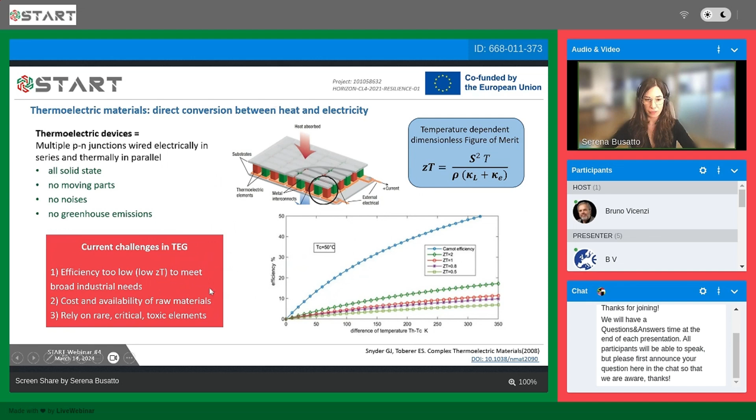So for these reasons, they are still limited to niche applications in most cases, but there are a lot of possible other applications that have been demonstrated and would be really important to apply and would be convenient cost-wise and efficiency-wise if the ZT values would be a little bit higher.

Okay, so in this presentation, I will talk about why mechanical alloying is very important for thermoelectric materials and can increase the properties of thermoelectric materials. So first of all, I will talk about the industrial scalability of the process and the fact that it's compatible with downstream consolidation techniques such as SPS. Then I will talk about the fact that mechanical alloying provides a material with nanostructure, which is very important to decrease thermal conductivity, which increases ZT of the material.

And also mechanical alloying is a low temperature process which allows to process materials and phases that are not stable up to their melting point, which is the case of tetrahedrites that we use as our raw materials. And finally, mechanical alloying is a solid state process that doesn't have byproducts. So it is possible to modify the material composition of the raw materials.

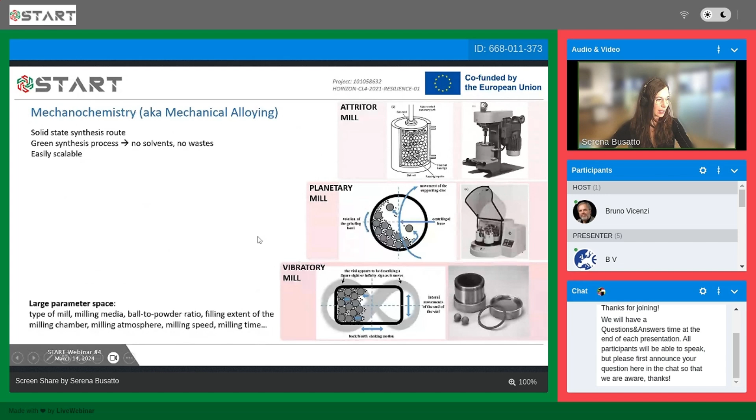Mechanochemistry is, as I said, a solid state synthesis route. So this is a green process and it is easily scalable. There is a large parameter space that can be adjusted. And the reactivity of the powder particles is promoted through mechanical forces under non-equilibrium conditions near room temperature by the transfer of mechanical energy to the particles, which generates dislocations and other defects, enhances the mass transport properties and the rates of particle-to-particle collisions, therefore also exposing continuously new surfaces, and all of these promotes reactivity.

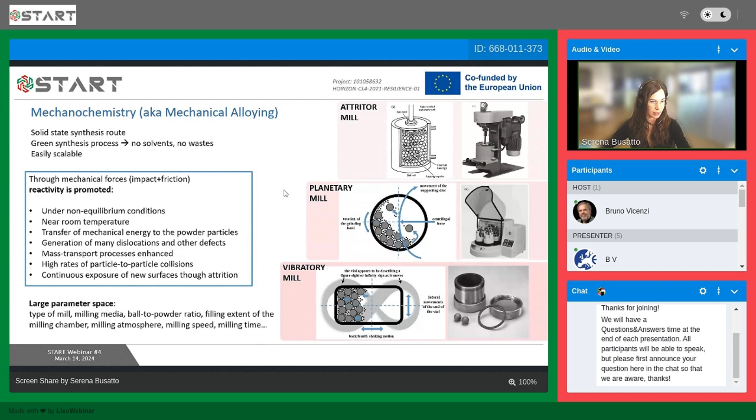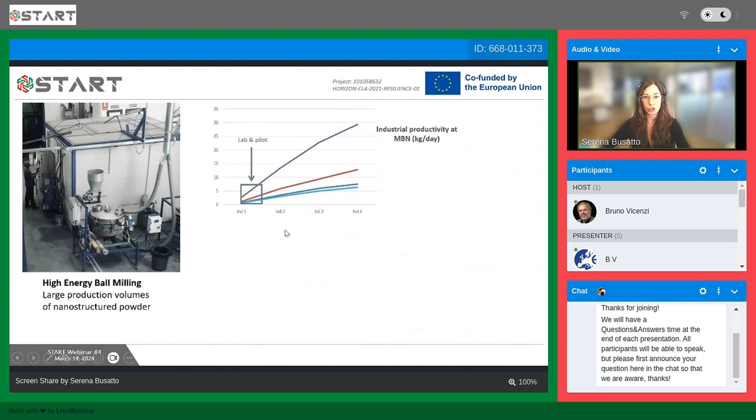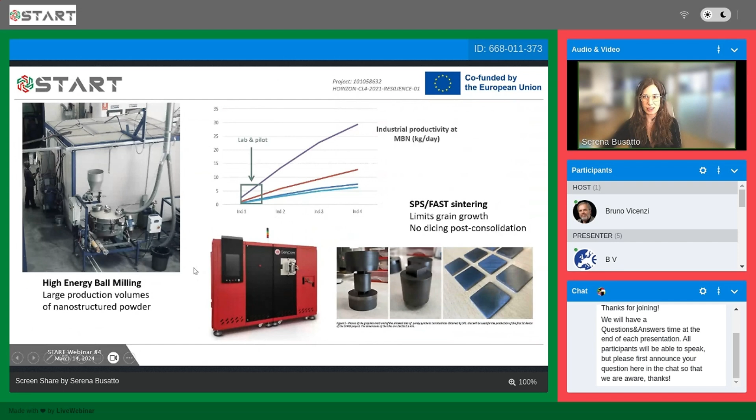Here I showed some examples of mills that are used at lab scale, but what we actually use at MBN are much larger high energy ball mills. Here you can see a person for scale, and we produce very large volumes of powders. And so the high productivity that we can reach combined with the sintering technology that is developed at GeniCore and will be described later by the next speaker, permits to make this process industrially convenient.

Let's go then now to the nanostructure and why this is important. I will first show you the figure of merit of thermoelectrics, how thermoelectrics work. So here is an example of a thermoelectric junction. What happens in thermoelectrics is that the carriers, that are electrons in N-type materials and holes in P-type, drift from the hot surface to the cold surface, and this builds an electrical potential across the material, which eventually counterbalances the drift. And the proportionality constant of the created potential over the temperature gradient is called the Seebeck coefficient, and describes the thermopower of the material.

Then this is the thermoelectric figure of merit, ZT, and depends on several properties. So the Seebeck coefficient is S, and then we have the electrical conductivity and the thermal conductivity. And as you can see here, unfortunately, the Seebeck coefficient and the electrical conductivity have two different trends. So one is higher for insulators, and the other one is higher for metals. While the thermal conductivity increases with free carrier concentration.

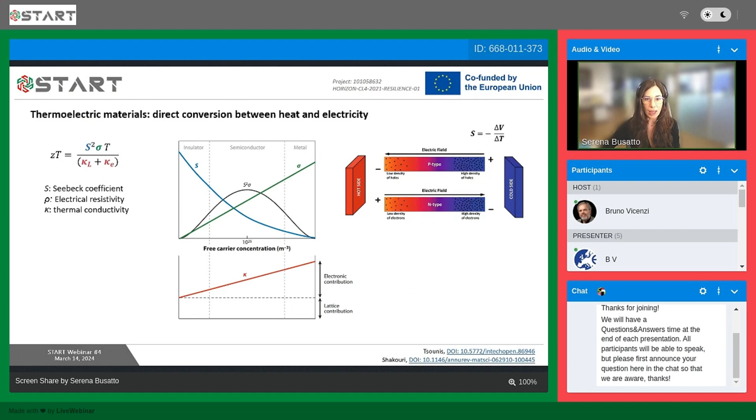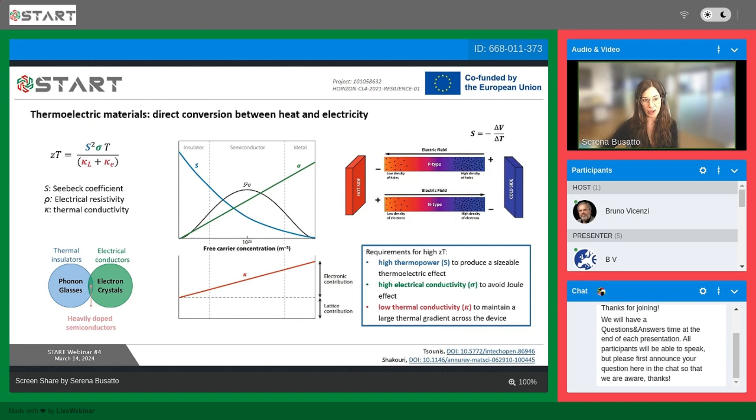This is why the requirements for having high ZT are to have a high thermopower to produce a sizable thermoelectric effect, but also to have a high conductivity to avoid Joule effect, and also to lower the thermal conductivity, as you can see from the formula here, to maintain a large thermal gradient across the device. So basically what we need to find are the so-called phonon glasses electron crystals, so thermal insulators but electrical conductors, which in fact are found in heavily doped semiconductors.

But why is nanostructuring so important? It's so important because the thermal conductivity has two contributions. One is from the lattice and one is from the electrons. But the one from the electrons is related to the electronic conductivity by the Wiedemann-Franz law, and therefore it cannot be lowered. So what we need to minimize is the lattice contribution.

And we can do so by nanostructuring, because the grain boundaries act as phonon scattering sites, and minimizing the mean free path of heat-carrying phonons can minimize thermal conductivity, while the electron transport is almost not affected by this.

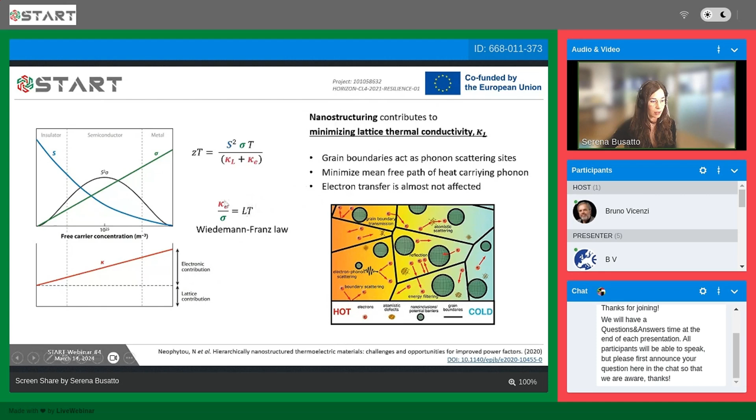Let's proceed then to talk about the tetrahedrites and how these materials can be treated by mechanical alloying or mechanochemistry. So tetrahedrites are sulfosalt minerals that are very common and are one of the main sources of copper and silver worldwide. They are abundant in nature and are found in mine tailings, normally in abandoned copper mines.

So they have many positive aspects: they have no critical or toxic elements and are suitable for large-scale production, and also have very tunable compositions that confer them diverse properties. Unfortunately, the ZT values are not so high compared to other materials, but their cost and availability make them still very, very important.

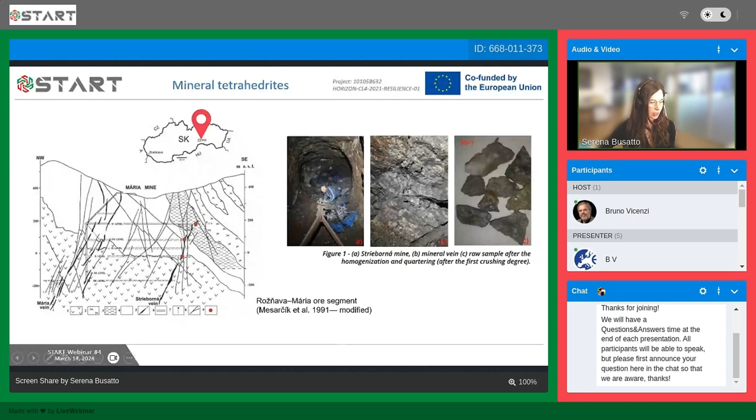Okay, but mineral tetrahedrites can have very variable compositions. So they are normally present as a solid solution between the tennantite and the tetrahedrite form. This means that at the antimony site, both antimony and arsenic can be present, and also that the copper can be partially substituted with other transition metals. Iron, zinc, manganese, and mercury are some of the most present in mineral tetrahedrites.

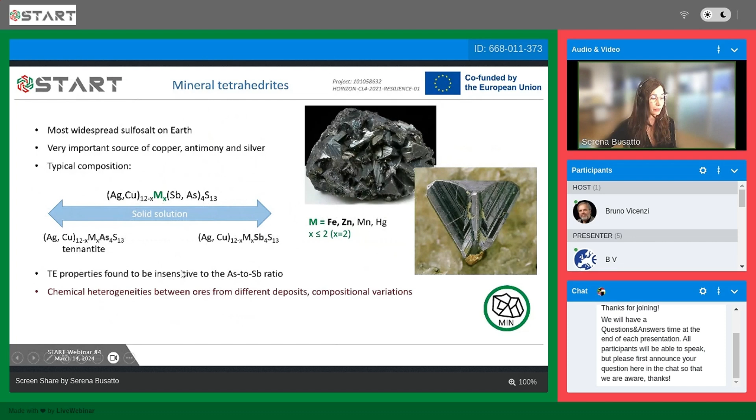Fortunately, the thermoelectric properties are not sensitive to the arsenic to antimony ratio, so this is a good thing. But there are some drawbacks. Different ores from different mines have many different chemical compositions, so it's difficult to find a process that works for all of them. And also they contain variable amounts of secondary mineral phases that can be difficult to treat, like chalcopyrite, quartz, and pyrite.

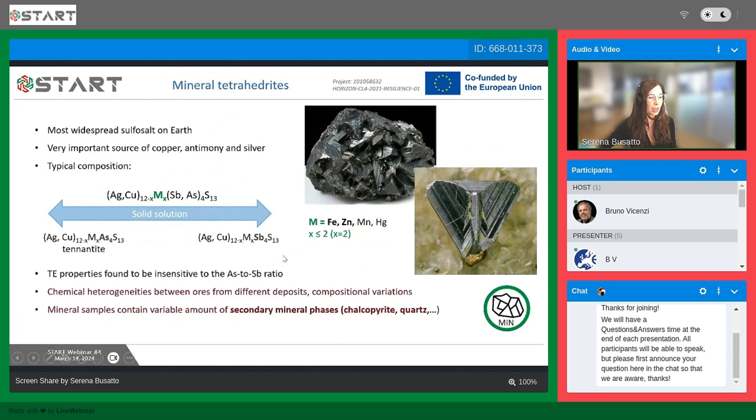This is the crystal structure of tetrahedrite. It's a very complex unit cell, composed of 58 atoms per unit cell, and this is one of the reasons why the thermal conductivity of this mineral is so low. And the other reason why it's so low is because there is a rattling motion of some copper atoms, resembling that of other thermoelectric materials like skutterudites and clathrates, that also contributes strong phonon-phonon scattering and lowers the thermal conductivity.

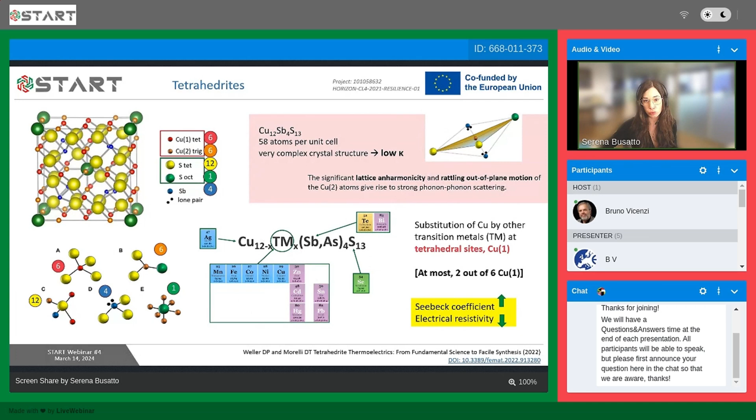Here you can see how all these different metals can be incorporated into the tetrahedral copper sites. So there are two different copper sites, tetrahedral and trigonal, and 2 out of the 6 tetrahedral copper sites can be substituted by other transition metals, conferring higher electrical conductivity and higher Seebeck coefficient.

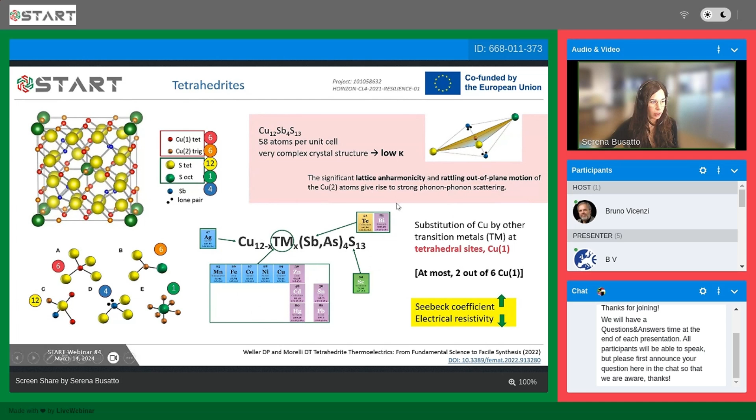Here is some further reading. This is a very recent paper and explains better why this rattling motion, and it's even more than a rattling motion of the copper atoms, can provide this very low thermal conductivity.

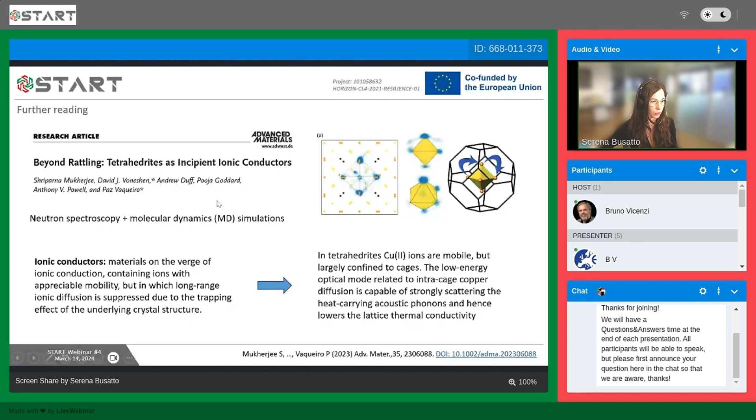The synthesis methods for tetrahedrites are multiple; some of them can be scaled up and others not. Melt crystallization and solution phase synthesis give very good phase control, but unfortunately are not scalable. In addition, solution phase synthesis also gives nanostructure to the material, but this is accompanied by byproducts. Other methods that have been tried are reactive SPS, which is very promising, but for now the phase control is not that good.

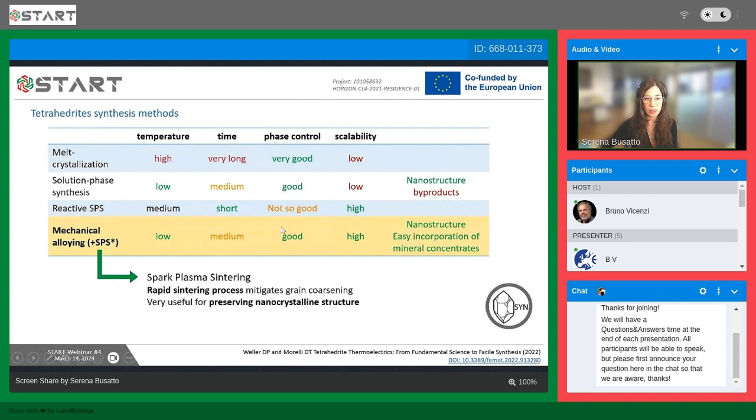And finally, mechanical alloying followed by spark plasma sintering is one of the best methods for the synthesis of tetrahedrites because of the low temperature, medium time, good phase control, high scalability, and also nanostructuring and easy incorporation of the mineral concentrate. And then the rapid spark plasma sintering process mitigates grain coarsening. That's very useful for preserving the nanocrystalline structure.

Okay, so then we go to this part, where I will explain to you how practically in the START project we use mechanical alloying and tetrahedrites. So we performed a very extensive experimental campaign using ball milling at lab scale, sintering, and measurement of the thermoelectric properties to identify the most performing tetrahedrite composition in terms of transition metal dopants that substitute at the copper sites. Taking into consideration many factors, among them the doping elements already present in the mineral concentrates, the phase formations, the thermal properties, electrical properties, and the stability of the tetrahedrite phase with these substituents.

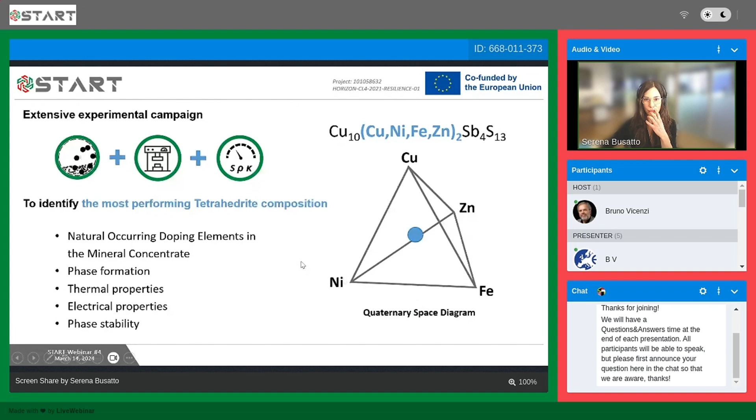So we work in these quaternary space diagrams and we identify the most performing composition. With this, we try to replicate at a larger scale. So here at MBN, with our high energy ball mills, the synthesis, and we could obtain the same phases that were obtained at lab scale. Also, we noticed that the presence of transition metal substituents not only improves the figure of merit, but also favors the stabilization of the tetrahedrite phase over the concurrent famatinite, which is not thermoelectric active.

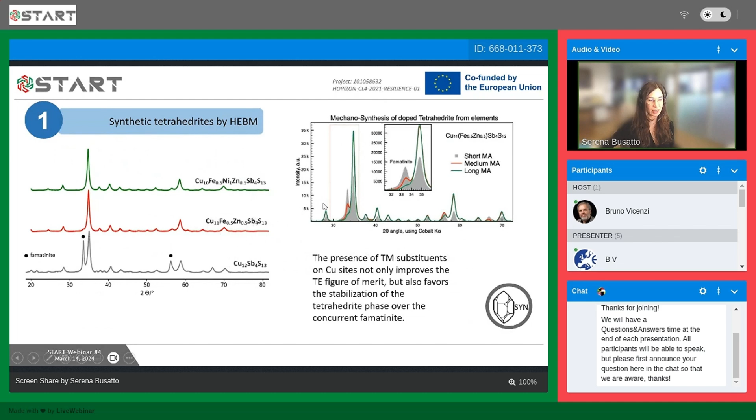So the rest needs to be balanced by adding synthetic elements. Of course, we count silver together with copper. And in case there are arsenic or bismuth in the composition, we count them together with antimony because we know that they will substitute that site. Okay, then we compensate with synthetic elements to reach the target composition. So this is what we tried.

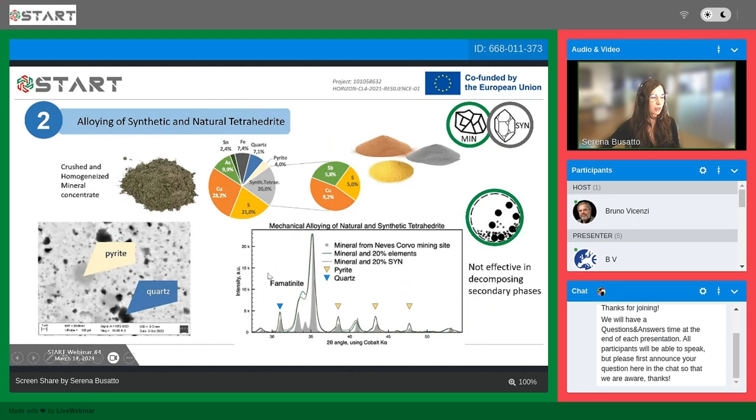This is an example of a concentrate that we received that was crushed and homogenized tetrahedrites, but unfortunately contained also some amounts of other phases such as pyrite and quartz, which were quite stable also to the ball milling process, which in fact was not effective in the decomposition of these secondary phases. But fortunately, there is something that we can do, and here I use the START robot to show you the electromagnetic separation, a very interesting process largely used in mining technology because it permits to separate magnetic and non-magnetic materials. And in our case, it could almost completely remove pyrite and quartz, so that we could get a concentrate that was more or less free of these other phases, difficult to treat.

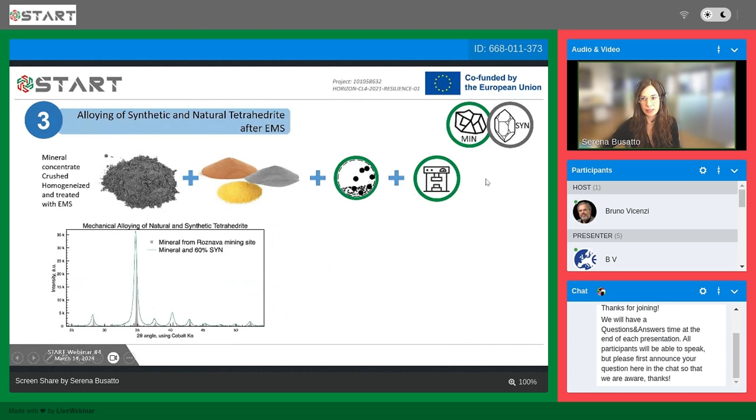So what I showed you in this presentation was that we first identified the element substitution that would give the best thermoelectric performance. We optimized first the composition for the synthetic tetrahedrites. Then we developed a scalable and environmentally friendly powder-based synthesis method for producing at large scale mineral-derived sulfide P-type thermoelectric materials. And GeniCore optimized the SPS consolidation of these materials for the production of mineral-derived sulfide P-type thermoelectric legs.

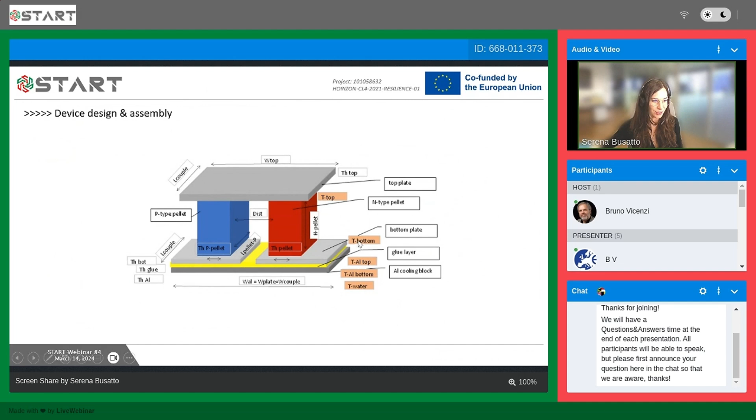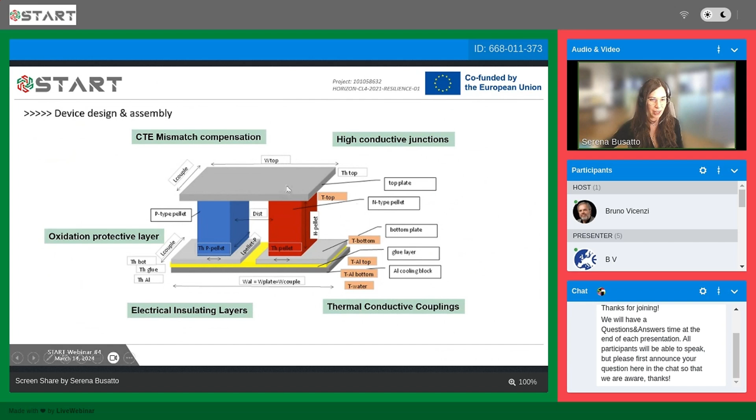So in other webinars, we will also talk about the development of the N-type material and also all the other things that are necessary in order to have good junctions, to protect from oxidation, to minimize the mismatch in the thermal expansion coefficient, and all the other things that need to be optimized in order to have good thermoelectric junctions. Okay, and with this I would like to wish you all a happy Pi Day.

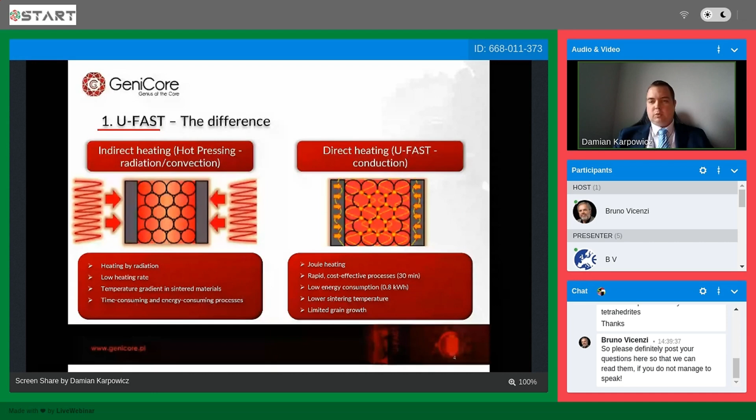When it comes to the pulsing system, when you read some information about the SPS technology, you will find that there's no 100% fact how the pulsing works. So there are also people using SPS technology who state that pulsing is not important and not necessary. Of course, we need to say that for some of the materials it's true, but there are materials where the pulsing has a big impact. So today I will try to show you some examples of those kinds of materials.

When it comes to GeniCore, maybe this is not the perfectly colorful graphic, but this is the waveform just taken from the oscilloscope to show you an example of the pulse. In the case of GeniCore, we can generate pulses below 1 millisecond, which we like to call micropulsing.

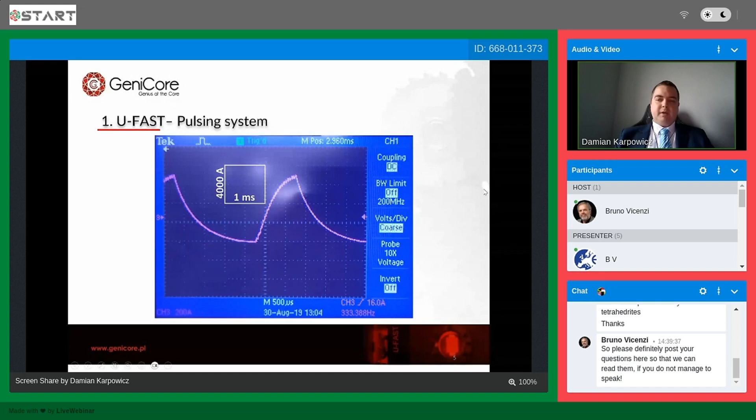For the SPS process, graphite molds are used. Different kinds of molds can be used, but in general, graphite molds are the best, thanks to their high resistance to pressure and temperature. And in GeniCore, we are able to produce the molds for our customers by using just graphite blocks. Otherwise, you may find that purchasing graphite molds may be expensive.

However, it needs to be emphasized that in SPS technology, we can directly sinter the powder. In this case, I just wanted to show you that for some cases when we produce, for example, multi-cavity, multi-layer forms, it will be easier for the operator to just load the molds with this kind of pre-compressed powder rather than to pour the pure metallic powder.

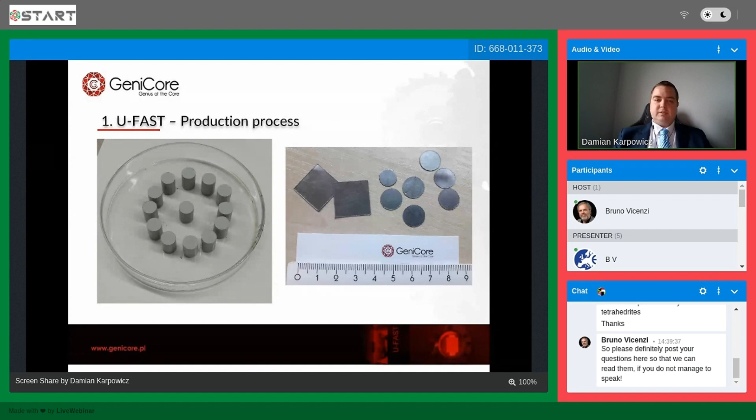We also use the graphite foil, which allows us to separate the sample from the graphite mold, which increases its lifetime significantly. So we can assume that one mold can withstand more than 100 processes if designed correctly.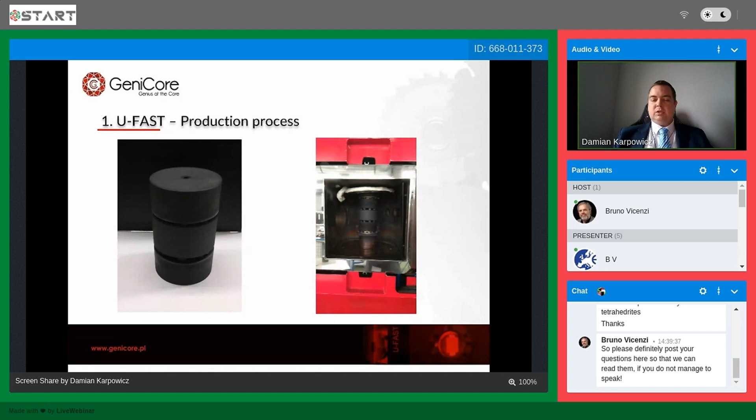So when it comes to temperature measurement, how we control what is happening inside, I think it is worth considering that temperature control is very, very important in SPS technology, because we need to watch out not to go too far with the temperature. And afterwards people see, even using other devices, that parameters are maybe not so accurate. But in the GeniCore solution, we are using mostly pyrometers. And when we make precise and accurate measurements with the thermocouples first, then the customer or user can just use the pyrometers.

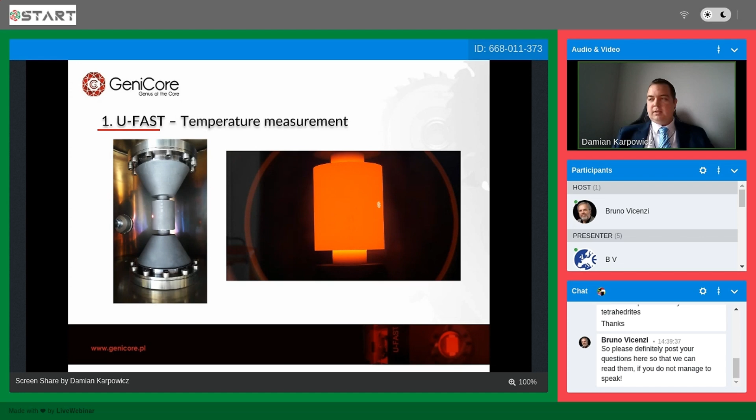So in this case, we are using the axial pyrometer, which is in the top stamp, top electrode of the device, and also two side pyrometers, which combined allow us to cover the full range of temperature, starting from room temperature up to 2500 Celsius degrees. In this specific example, we intentionally do not show the graphite blankets to allow you to see the laser dot, which typically in SPS devices helps you to position the pyrometers correctly by automatically controlling it with the servo mechanism and PLC.

So going to the devices, the smallest one, UFast Compact. It is very powerful, yet quite small. An interesting fact which we like to mention is that it can be transported even with a typical elevator, which we did at a recent event. We also posted it on LinkedIn, because it's very comfortable to have this kind of size. And yet, as you can see here, a very, very powerful tool when it comes to sintering.

So 3 kiloamps is enough for us to sinter 40 millimeter tungsten carbide, as you can see here, even with very high heating rates of 100 Celsius degrees per minute. And of course, we achieved full density. So we can sum up that this small device is all that is necessary for R&D institutes to work on small samples and hopefully scale up in future.

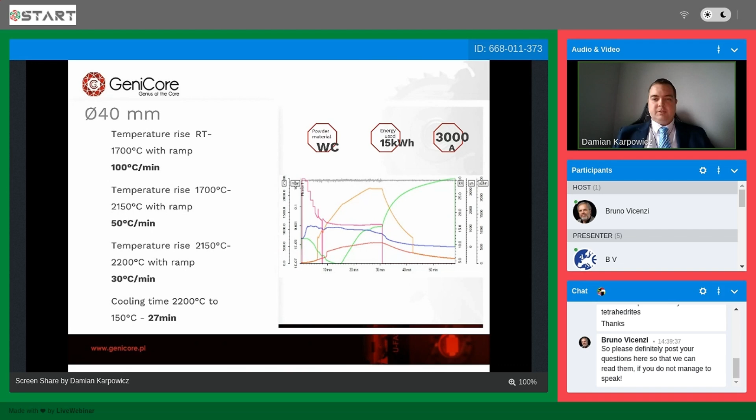The UFast GC device is the middle-sized, single chamber device, which allows us to produce samples up to 100 millimeters. It needs to be emphasized that up to 100 millimeters means full density, the best quality sample which can be produced using SPS technology. Sometimes, of course, you will be able to produce bigger samples, but 100 millimeters is what we recommend for this pressure and current available.

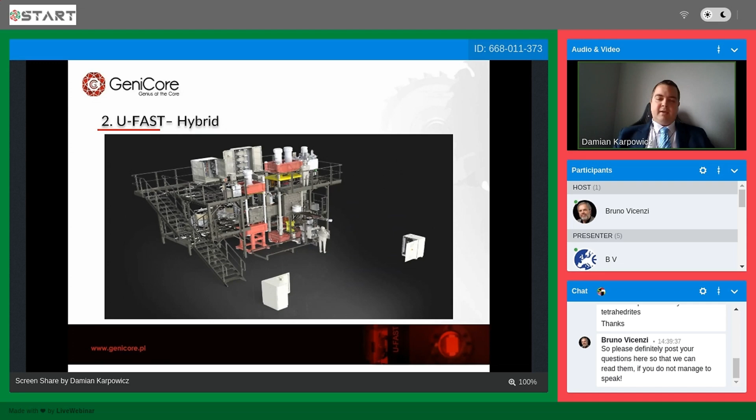The UFast hybrid, so the biggest device which is possible when it comes to GeniCore, very big diameters, which requires more than just the DC power supplies to offer the uniform temperature distribution while having at the same time the high heating rates. So as you can see here, there are several types. So currently we are building the biggest one

at GeniCore, which will have more or less a max heating power of 1 megawatt when it comes to the DC power supply. So as we can see, a very powerful power supply that allows us to use a lot of DC heating, and max heating power for induction. So a separate AC power supply to somehow enhance our sintering.

So we should understand that when we would like to sinter very big diameters like 200 millimeters, 300 millimeters, we should also consider the volume of the sample. So if we would like to heat in, let's say, an SPS way, so with high heating rates, with limited grain growth, which is the main cause of very good quality of the samples, we need to do it in a proper way. So that is why we allow our customers to use the DC and AC power supplies independently. And thus, the induction plus the DC power supply allow us to achieve very high heating rates, yet very good uniform temperature distribution. So this is the main idea for UFast hybrid.

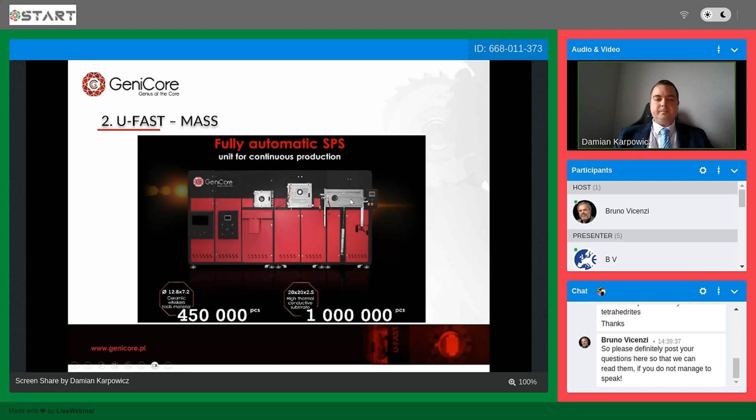The pulse plasma compaction technology is the one which we use for the DEC material production, so diamond enhanced cemented carbide, and it was also mentioned in the previous presentation. So to give you just some feeling about this technology, it is very similar to the SPS technology. However, we are using 2000 volts instead of 10 volts. So here we can confidently say that we have plasma inside. So it allows us to generate rectangular high voltage pulses and to sinter, for example, tungsten carbide with 30% of diamond content in whole volume without diamond graphitization.

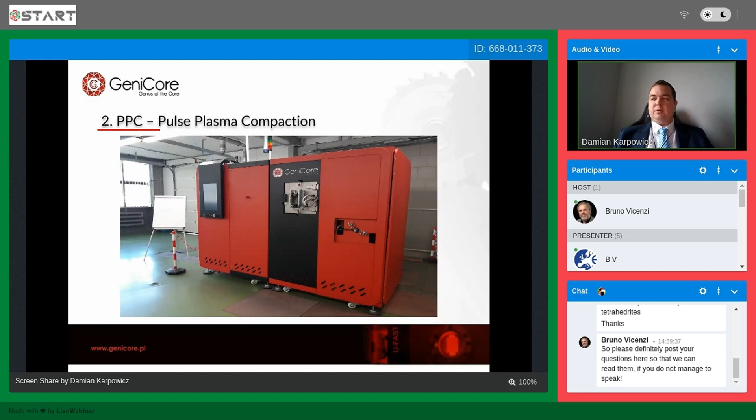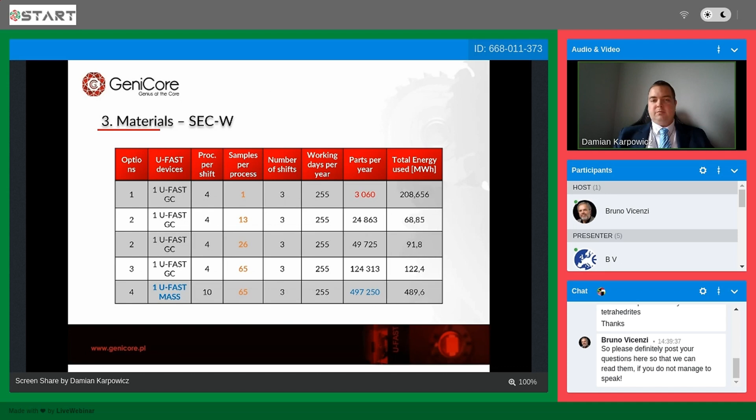And when we see the production examples, which are real readings from the power supply, we can see that UFast mass can produce almost 500,000 pieces per year, just with one operator and with very limited energy used. And as mentioned before, 65 pieces per one run. So it needs to be emphasized that we are able to achieve better results when it comes to mold designing.

Also, the sintering process time, you can pay attention to it, 75 minutes compared to 270. And this is literally because we are heating the powder directly. The cooling time, unfortunately, we didn't have a comparison to the conventional method. Nevertheless, I think we can easily assume it was also shorter because we use an advanced cooling system for the stamps, and the pore size and crystal size are also smaller.

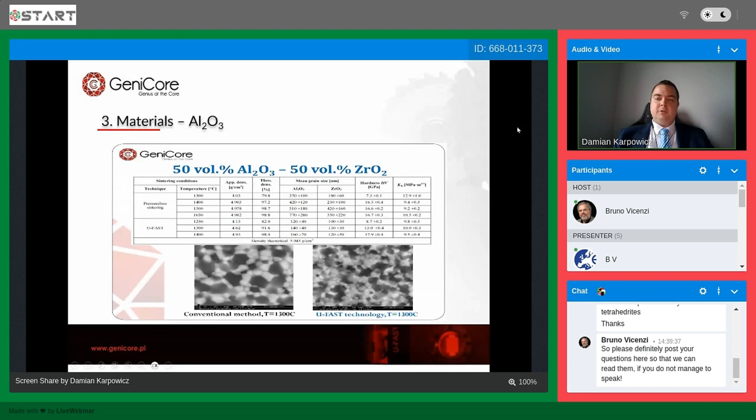When it comes to limiting the grain growth, I think this alumina can be a great example because with the naked eye we can see the difference between the conventional method on the left side and UFast technology on the right side. So this is the phenomenon which can increase the quality of our materials.

Transparent ceramic, there are a lot of applications where it can be used. We specifically had a chance to produce the covers for missiles. So infrared and guided missiles need to have covers on the top, and basically, transparent ceramic can be used there. However, there are some challenges related to the shapes when it comes to this application.

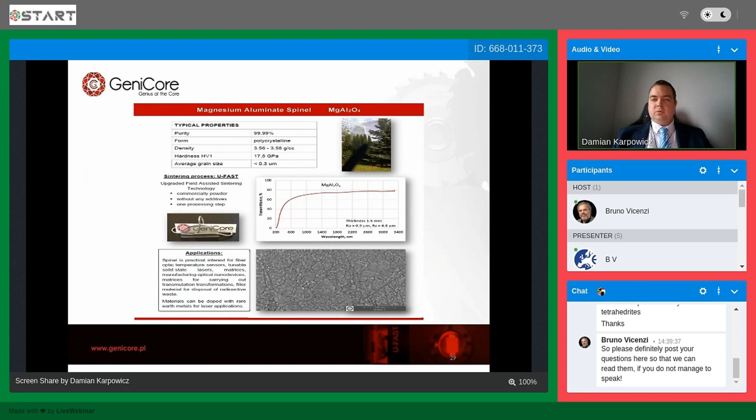Nevertheless, the idea was to show that you can produce with SPS technology fully transparent ceramic with commercially available powders without any additives. So no lithium, nothing, just the commercially purchased powder. And with one processing step, we are able to achieve the transparent ceramic. Also, magnesium aluminate spinel can generate very interesting results. If you would like to know more about it, please feel free to contact me and I will share the details with you.

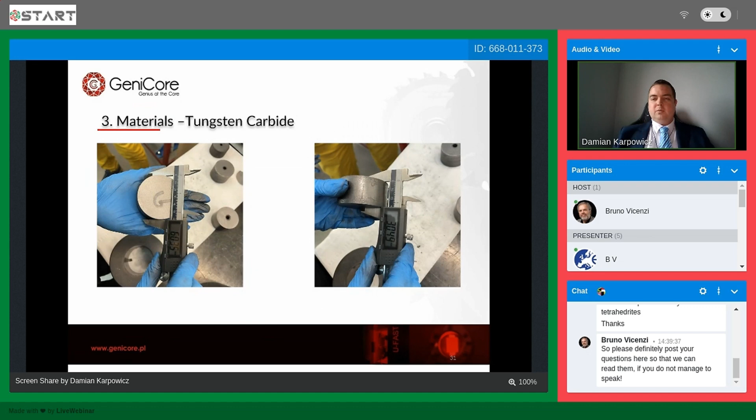Another example which I would like to share with you is tungsten carbide. This is specifically a project for our customer in China, the second biggest tungsten carbide producer, and they asked us to provide a device which will allow them to produce tungsten carbide with very high density and hardness, 60 millimeters in diameter, 30 millimeters in height. So quite big volume, almost 1.5 kilograms of tungsten carbide, and we achieved it. We provided both the device and the sintering process technology to allow them to start production immediately after commissioning.

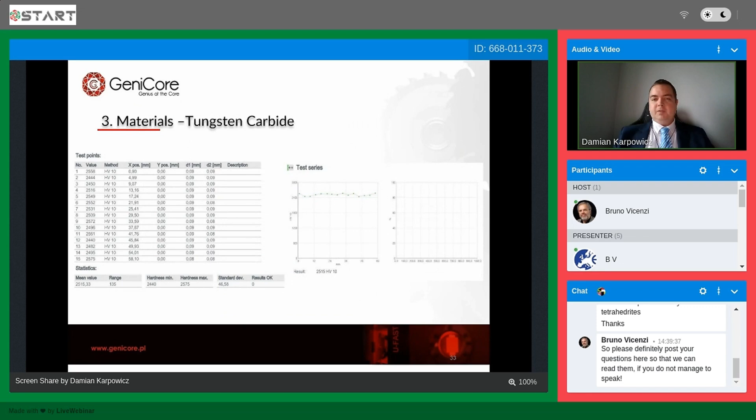And as you can see, the mean value of HV10 was 2,515, which is quite a good result in their opinion. And no porosity at all. So as we can see, the good sides of SPS technology are visible here.

For diamond enhanced cemented carbide, the material produced with the pulse plasma compaction technology, it was quite hard for us to start selling this material because besides selling the devices, we are also producing DEC material, as probably mentioned before.

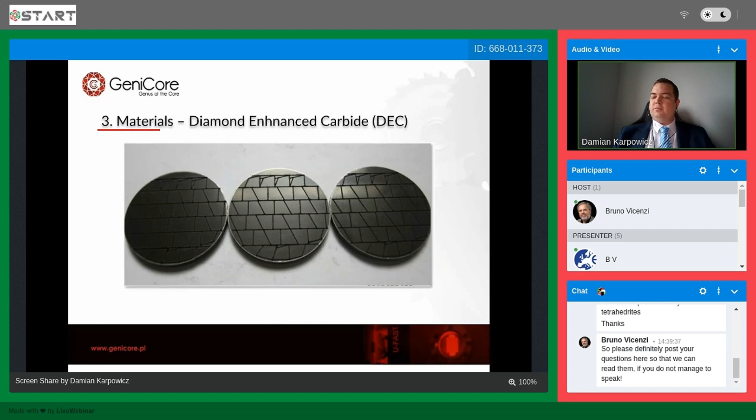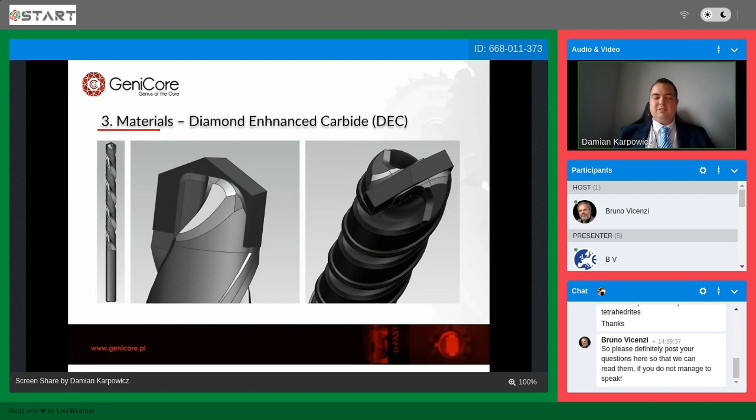So people initially didn't believe that we can sinter tungsten carbide with diamond in full volume without diamond graphitization. So we needed to generate some examples, and here you can see one. We purchased a drill just in the market and replaced the tip with the DEC material. And with the help of one of the companies from the group, we just made a drill. And after that, we performed the test. So a dry drilling test with the reference drill and the DEC drill.

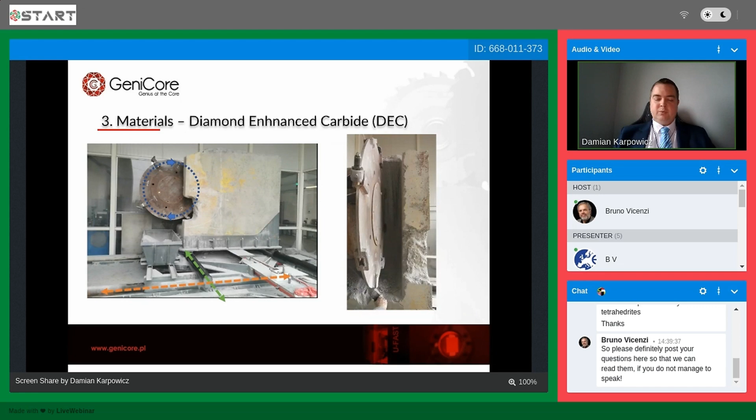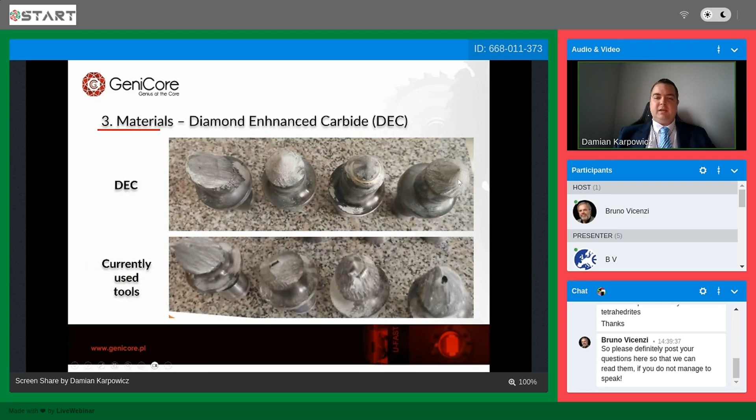In case of mining, we also have a lot of applications, but today I will show you the one from which it was started. So rotary pick knives, similar situation. We just took out the tungsten carbide and put our DEC material in it, and you can see the difference. These are the tools after performing a test with the mill, as you can see here. So we can see that DEC material can withstand much more than just typical tungsten carbide.

Functionally graded materials: we needed to learn how to sinter different kinds of material in layers. In this case, a layer composed of DEC, 30% of diamonds, formed on a tungsten carbide substrate, to limit the cost and make the brazing easier, because brazing is hard for DEC material. We need to admit that. It took us some time to understand how to do it.

Near-net shape production: this is more related to the disadvantages of SPS technology, so limited geometry. However, as you can see, we can also produce near-net shape materials. These are button bits, which are used in mines for drilling in roofs, for example, and also functionally graded materials, so DEC on the top and tungsten carbide on the bottom. There are also more sophisticated shapes available, even 3D printed by new methods. However, it will take some time to show you the results.

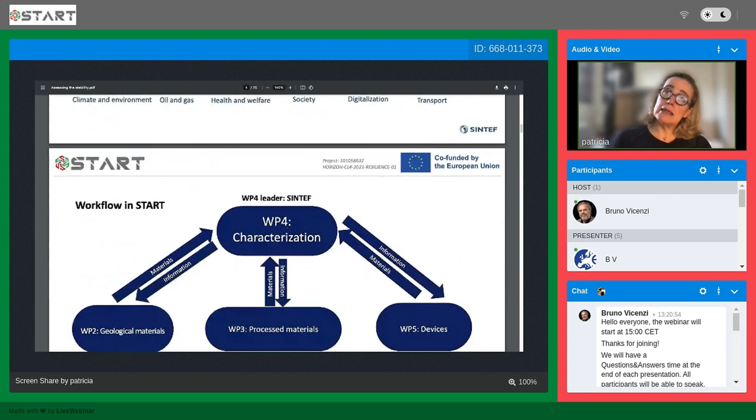But basically what they want to show here is that we are involved in most activities, ranging from wind, solar, oil, boats, construction, all sorts of things. And here you have just a list of the things we do. In our group, we work mostly with characterization of materials. We try to use advanced tools. We also do a lot of modeling, mostly atomistic, so DFT type of modeling.

So in the project START, as I told you, our major role is characterization. We are also involved in other work packages, but it's mostly characterization. So basically we get materials from the other work packages and then we provide information back. We also do some processing, but it's not so industrially applied, it's more fundamental type of processing.

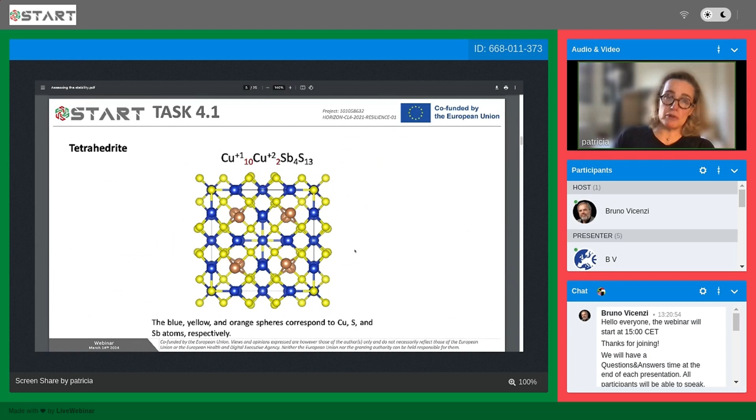So as Serena already told you, we are dealing with tetrahedrite. Tetrahedrite is based on copper, and these copper atoms have two types of positions, one with an oxidation state of 1 and another with an oxidation state of 2. So it means that we can replace these atoms with elements which have the same oxidation states. And so what we tried to do when we started was to see how we could maximize the performance of the thermoelectric materials.

If we go to the literature, we see a lot of different types of elements tested. And we decided, okay, let's try and see what we can get with these elements too. Of course, for the antimony, we don't really want to replace it with arsenic or tellurium, which are not very nice, and tellurium is not very abundant. So we stick with antimony.

So one of the first experiments we did, we decided to use a design of experiments. For this matrix we decided to use the Taguchi method, but we were a bit too wild, so we decided to go to very high variations in composition, which in the end proved not to be a good choice.

And at the lab, in addition to what Serena is doing at an industrial scale, we also use this very high energy ball milling. This is a machine that allows you to really make sure you put all the elements into a solid solution. But to do this type of experiment, we had to optimize the milling parameters, and we did that by running one of these Taguchi compositions, which in fact is a composition that is now being used, but we are not using nickel.

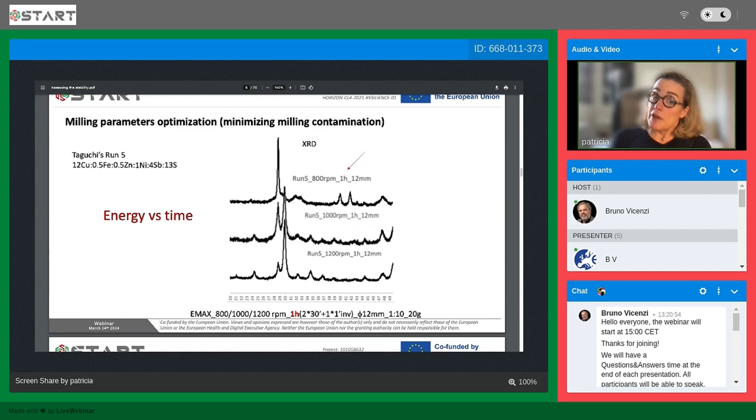And you can see that only at 800 and 1,000 and even at 1,200 rotations per minute, with 1 hour, we still don't get only tetrahedrite, because this peak here, which is at around 28, 29, is another phase called famatinite. So 1 hour was clearly not enough. And then we decided, okay, now let's go for 2 hours. And with 2 hours, we can see that for 1,200 rotations per minute, we only have tetrahedrite. So we were able to select the parameters.

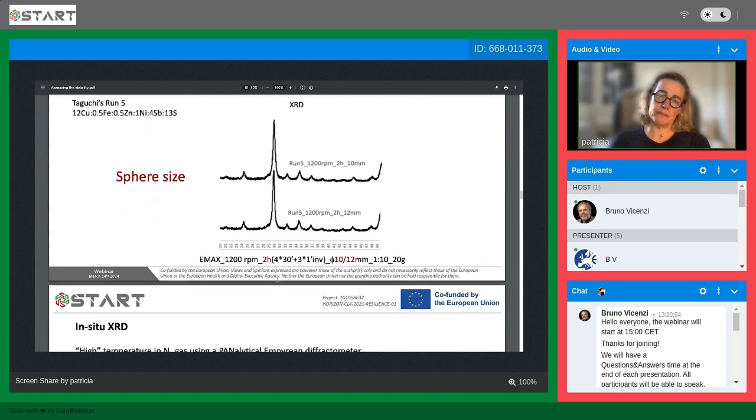The other thing we wanted to make sure was what kind of sphere should we use. And it turns out that either 10 millimeters or 12 millimeters are suitable to achieve what we wanted. So in the end, this was what we have chosen as parameters. Then one thing that we tried to do to characterize our material in terms of stability was to use in situ XRD. So you just do XRD while you're heating your material.

And so this was the thermal cycle employed. We started at room temperature, then we increased quite fast the temperature, we let it stabilize for 2 hours, and then we acquire another diffraction pattern, and so on. Given that we are thinking of using tetrahedrite for temperatures in the range between 300 and 400, this was the thermal cycle that we have employed. And if you look here, these are some of the runs we've done with these materials, which were a bit wild because they had too many substitutions.

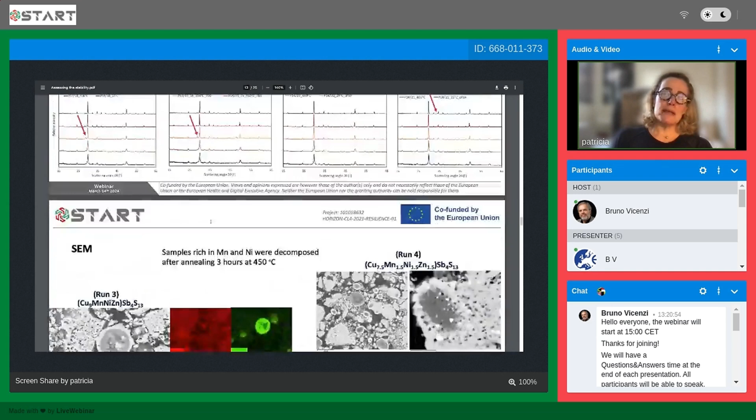When you look at the diffraction patterns, which were acquired at different temperatures, the bottom one is at room temperature, then 150, then 300, then 450, and then again, after cooling down, 25 degrees. And when you look at this, you see some peaks, but most samples are essentially tetrahedrite. But when we look at the SEM images, we see that we have a lot of things going on. There's a lot of decomposition.

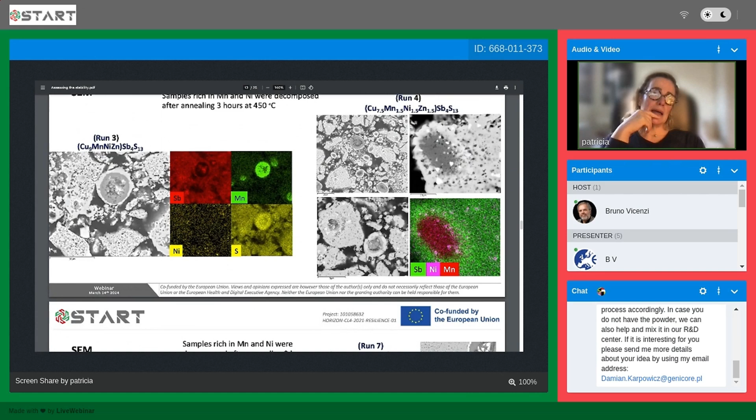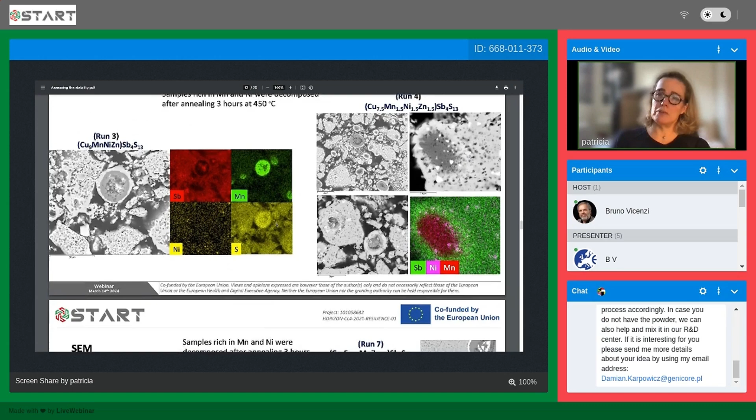And the most important aspect that we take from this initial study was that XRD is probably not the best technique. Even if you perform annealing while you're acquiring your XRD patterns, it is not the best technique because most samples had very complex microstructures. And one of the points that was really important and we are investigating now is that all samples after annealing had this type of dark phase. It looked like pores, but we were not completely sure what it was. Now we know what they are.

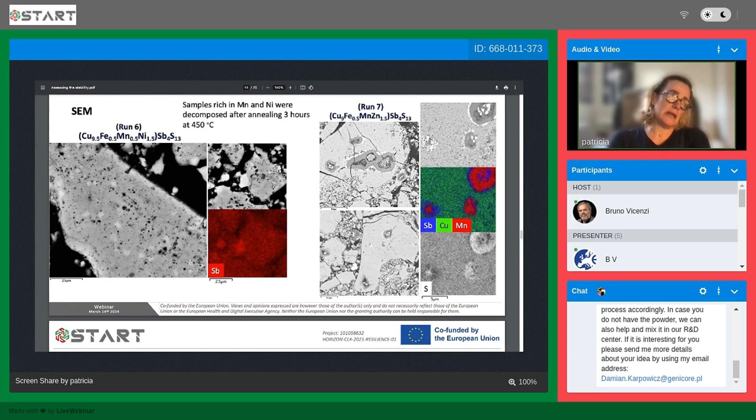So this is a very important aspect for tetrahedrite, because no matter what the composition is, if you have tetrahedrite after annealing, in our case the materials produced by ball milling, you always get this dark phase. So what we have done next was to use scanning electron microscopy. And here you see that again, you have all these holes, things that look like pores, but we were not totally sure of what they could be. But then I will show you some results.

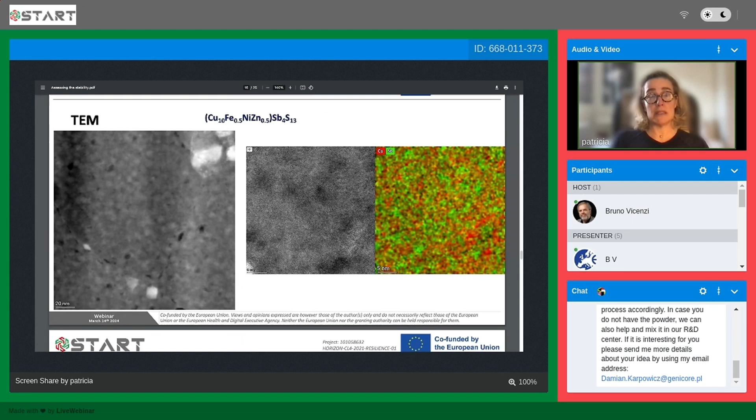An additional aspect in which TEM is one of the few techniques that can provide information is that when we anneal the samples, we see a very fine decomposition, or a very fine microstructure in the order of 10 nanometers. And with EDX in this case, we have regions which are a little bit more enriched in antimony, and other regions a little bit more enriched in copper. This means that we are probably having the decomposition into two different types of tetrahedrites at a very fine scale, which might be interesting for the ZT, but we are still not sure. We are still investigating this.

Again, if you go to high resolution TEM, you see this contrast difference, which we believe is related to the chemical composition. And this is something we are still trying to understand. So at around the 10 nanometer scale, you see that there are some regions which have a higher mass and regions which have a lower mass. The structure is exactly the same. And we believe that what we're seeing is possibly the initial stages of a spinodal decomposition.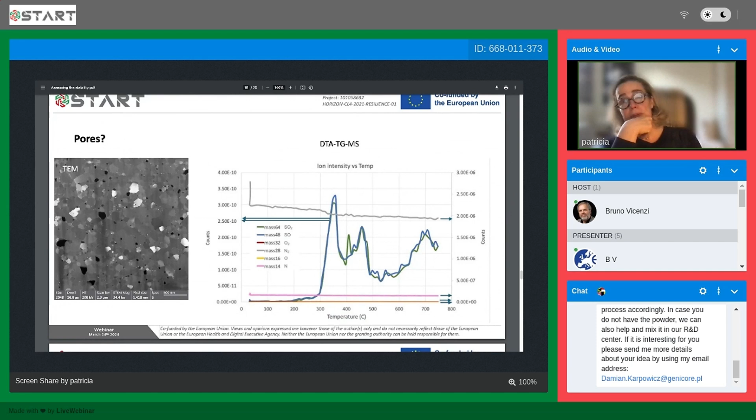Then the other question was, what is this type of pores? What is this porosity? So at SINTEF, we have this DTA-TG mass spectrometry instrument. So we do a DTA and we measure the mass as well by TG, but then we have the possibility to measure the composition of the gases which are being released by the sample. And what we could conclude from this is that we are losing oxygen, we are losing sulfur from our tetrahedrite. And this means that SO2 is being formed. So you see that we have the mass for the SO2 and SO. After annealing at around 300, this starts to happen.

This is a very important result actually, because what we believe is happening is that by ball milling, it's virtually impossible to really remove all oxygen. It's very difficult, especially if you think about the industrial conditions. So we'll always have some oxygen present. And this oxygen will react with sulfur and will form gas in the sample.

The most important implication here is not so much the initial fabrication, because of course the amount of oxygen is going to be finite. It's whatever is inside. You form the pores. If they're very nanometric, maybe they might even be interesting from the point of view of scattering phonons, and the ZT might be improved. So that's not really the issue.

But the issue is that above 300 degrees C, it will be very important to make sure that tetrahedrite is not exposed to air. And this has implications at the level of the fabrication of the devices, because it means that they need to be sealed. They cannot be in air, because otherwise you'll have oxygen diffusing in and you'll have the formation of gas, which in the long-term service of the devices will pose problems.

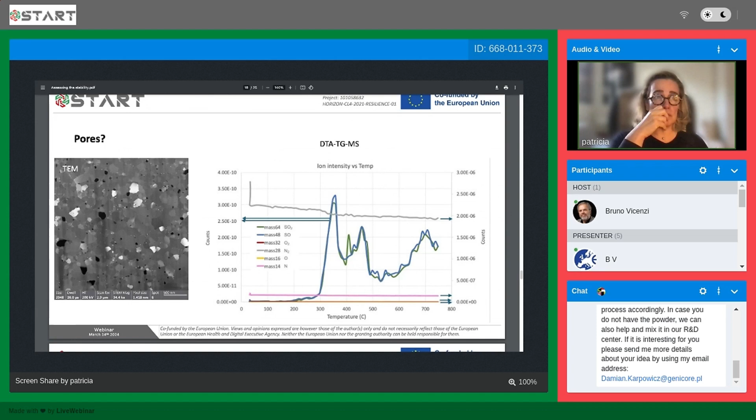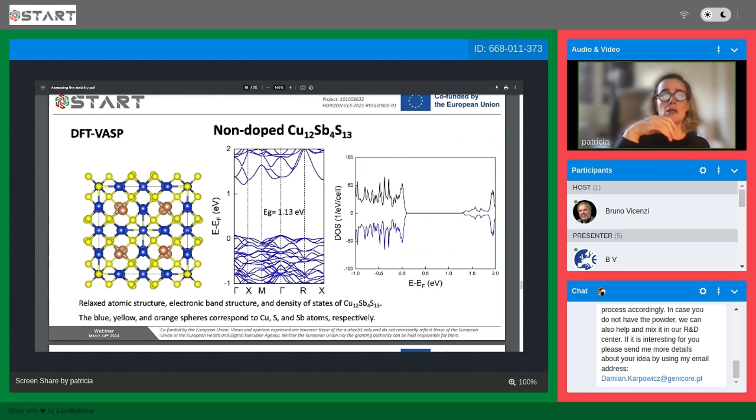Another thing we've done, another line of activity related also with the stability and the possibility of the different compositions, is to do density functional theory atomistic calculations in order to try to have some fundamental understanding of the materials. So this is again preliminary results, but we can at least have some trends. So when we apply these methods to pure tetrahedrite, non-doped, we see that we have quite a large band gap. It's not exactly the value which is published, but it's interesting to compare.

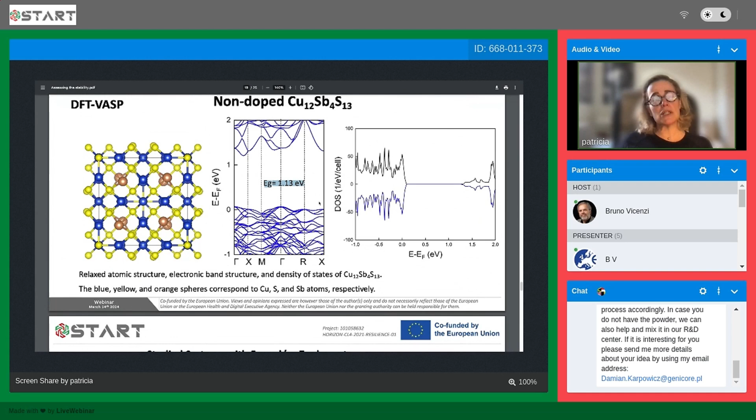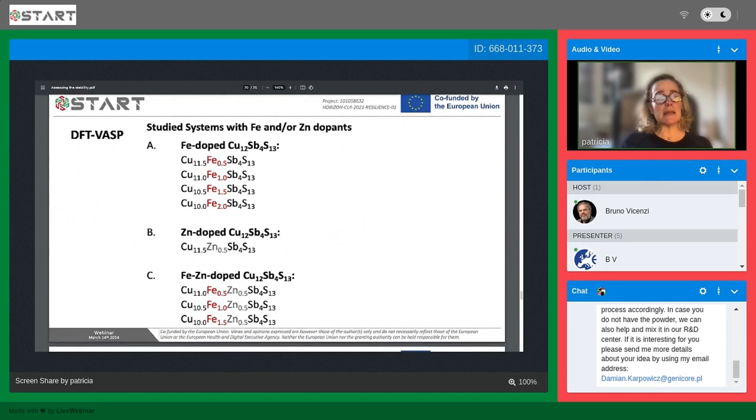So I'm going to show you now when we dope with iron and with zinc, because this is what we have done. What we see is that the influence of iron is indeed to close the gap, and this is usually what is best for tetrahedrite, to have a band gap, so a semiconducting material, but with a very small band gap. And this is what happens with the presence of iron, and that's why iron is one of the chosen elements by the START project.

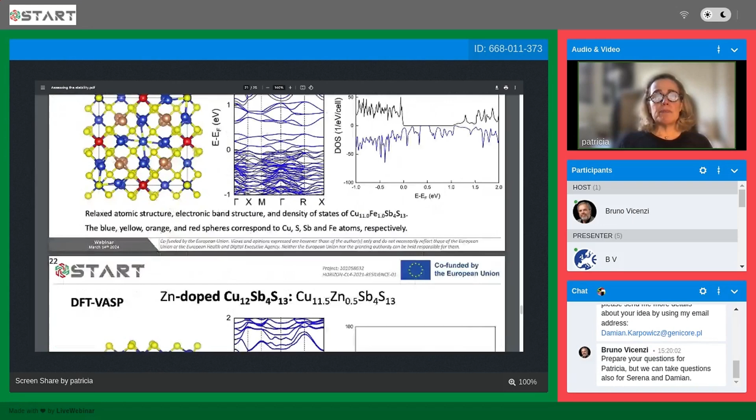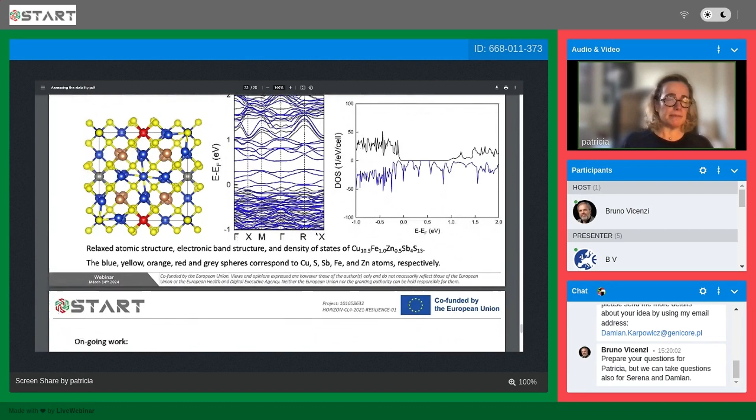When we put zinc, then it's completely the opposite. So zinc doesn't really change the band gap that much compared to copper. And then, of course, when you mix both, when you have iron and zinc, then again you have the populated region here, saying that we have a decreased band gap, which is interesting for the properties of the material in terms of thermoelectric behavior.

So now I'm going to show you what we are doing now. In addition to the characterizations of samples that people send to us, we still have a background activity, also to combine with the DFT calculations. So we are now working mostly with the third and the fourth campaign, as we call them. That's the name we have internally at SINTEF. So in this third campaign, we're working on the composition in which the copper, so the transition metals, are 12. So we have 10 copper 1+ and 2 copper 2+.

Then in this third campaign, we are using iron and zinc to replace them and then measure thermoelectric properties, in order to also calculate what we are expecting in terms of behavior with simulations. And this is in fact the composition which has been selected, around this, with iron and zinc in around these proportions. So this is something we're trying to do in order to study the material from a fundamental point of view.

And then another finding is that if you have an excess of copper, usually the ZT is better. So in this case, what we're trying to do is to also study it from the fundamental point of view and then validate with experimental results.